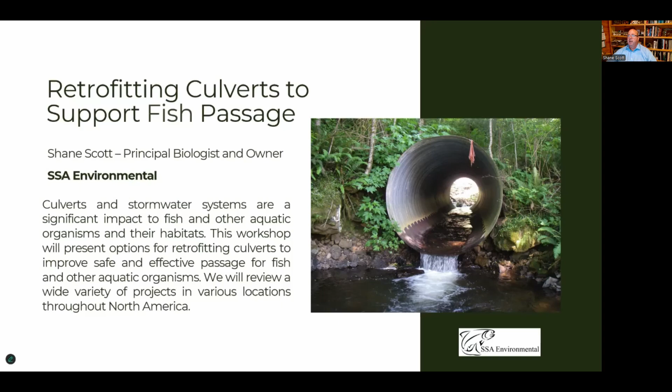So this is the little blurb I had on my registration: talk about culverts and fish passage today, and what we could do at culverts, sort of a low-tech approach to a big issue here and around the world. Just real quick by way of organization: I'll do a quick introduction, background, definitions, just so we're working on the same language. As I've learned, the Corps of Engineers have their language, engineers have their language, accountants have their language. What's the language of culverts? We'll talk about that today.

Then the magnitude of the problem, focusing on North America, the history of retrofits, what we've done in the past on culverts to help fish get through, and then current technologies, some ideas, some pretty exciting projects we're working on, and case histories. I've seen a registration list for this presentation, a lot of engineers, stormwater types - it seems like folks that need answers, or know what questions to ask.

I spent the weekend up in the Metro Vancouver area in BC working with different stormwater groups on several culvert retrofits and inspections, so it's kind of a new world for me. And then some time for Q&A at the end. If anybody has a clarification question, something short I can respond to, please ask - John will help facilitate that. Longer, more in-depth questions we can answer at the end of the program, or you'll have my contact information and we can talk about that at the end.

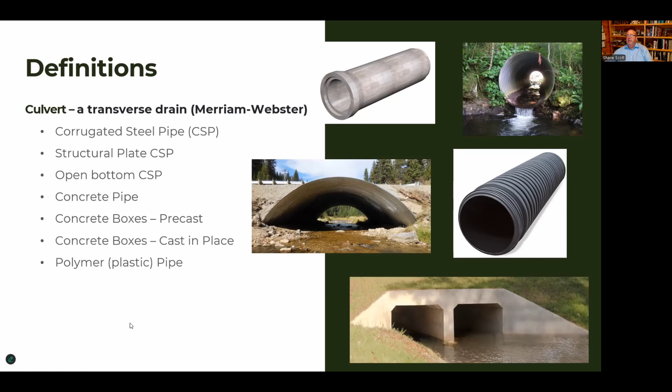This was new to me until a few years ago. I was always fish passage - I'm a fish passage biologist, concrete and salmon, that's what our world is. But working outside the Pacific Northwest and working now internationally, this term AOP is our kind of term of art in this fish passage world, and it's aquatic organism passage.

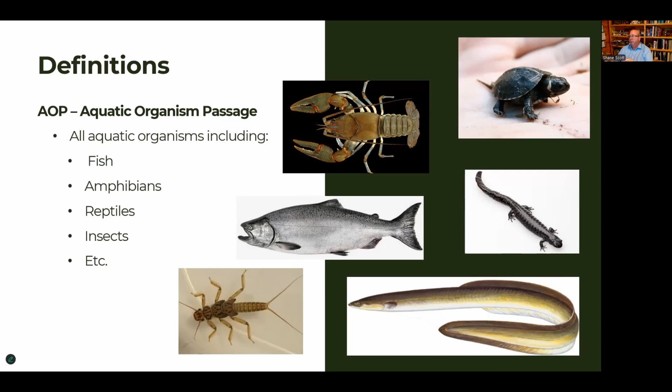So it's not focusing on just salmon, but all the other organisms—you expand to everything in the creek, all the creepy crawlers, anadromous species, all the different kinds. I've worked on culvert projects that include all of these species.

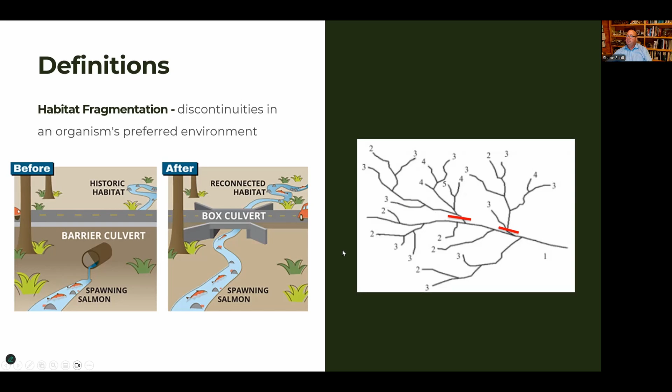And then success, that's an amazing one. That's really interesting—what is success? I work with federal ESA regulators down to, well over to, asphalt contractors replacing a culvert in Pennsylvania. So it's a wide variety. In my world, it's expanded opportunity, getting critters past those sites.

That's one success. Species reintroduction, that's another measure of success. Reduced habitat fragmentation in general. And one I didn't put down here—I spent my whole career working with engineers, and I joke that my job is to keep engineers out of jail. They're always building things, always going out and doing stuff, but it affects the environment often, and my job has been to help minimize that. So maybe a fourth bullet is keep the regulators off your back.

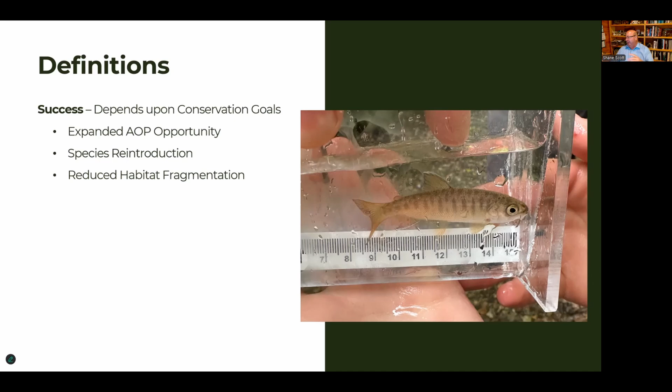So this is what I've been working on the last several years—trying to understand the magnitude of the issues of culverts and their effect on aquatic organism passage in North America primarily, but also looking out at the world. There are wonderful groups out there collecting and analyzing culvert information. There's the National Aquatic Barrier Inventory, which adds up all the information out there. Every state and jurisdiction seems to have some kind of list of culverts and some kind of assessment.

But just to give you a reference on the magnitude of what we're dealing with—this is the National Aquatic Barrier Inventory. In the Pacific Northwest states, Oregon, Washington, Idaho, there are 775,000 barriers. Only 8% have been analyzed, and only 0.5% have actually been mitigated. So a lot of people are doing a lot of good work, it's just such a huge issue.

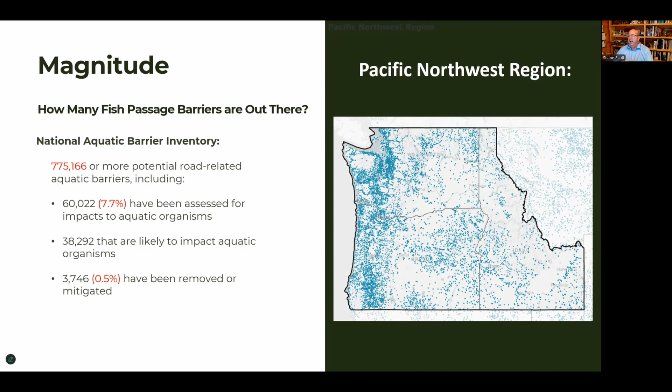We know where all of our dams are. We're working on, especially in the Columbia River and Pacific Northwest, spending a lot of time, effort and resources trying to reduce the impacts of those dams. But you have all these culverts, just a mass of culverts.

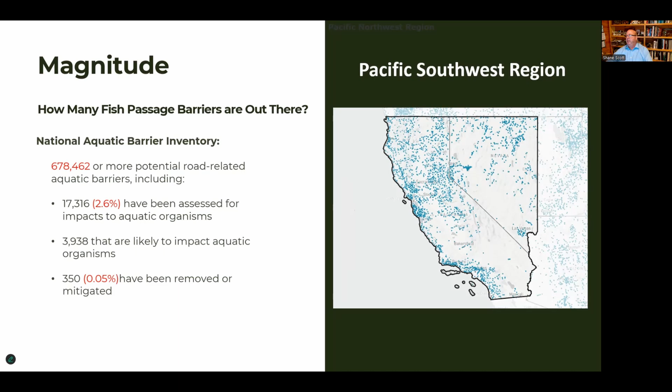Another area, the Pacific Southwest: 680,000 barriers, and only 0.05% have been mitigated. Once again, a ton of money is being spent. There's just so many—it's a death of a thousand cuts on these critters.

In the Northeast, 450,000 barriers, and 0.03% have been removed or mitigated. A lot of good work going on out there, but the problem's just massive.

The thing that really got me involved with culvert passage was a Supreme Court case in Washington State between the state and Native American tribes, primarily in the Puget Sound area, where the decision was made to protect the habitat that supports salmon. The agreement was that Washington State Department of Transportation will replace 400 culverts by 2030 to open up about 90% of habitat blocked by culverts.

To date, 146 have been corrected, and the current estimate to finish all of them is $7.8 billion. There was a three-culvert project just awarded north of Seattle on Interstate 5, our main north-south route—$136 million to replace three culverts. Now what can you and I do with $136 million? It's such an incredible cost, and that's just in the Puget Sound area, all borne on the backs of citizens in Washington State.

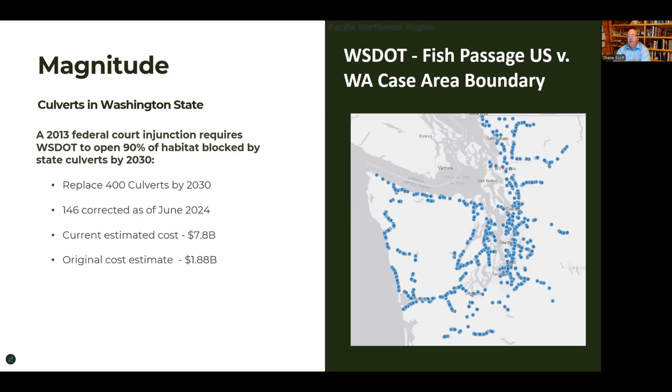So you look at the cost, you look at the magnitude, and there's got to be a better way. Right now Washington Department of Fish and Wildlife has a barrier removal board, and it's a very common grant process where you compete for dollars to get your culvert fixed. The 23 to 25 project list has about $85 million. At that rate, we're never going to get to that $7.8 billion. We're never going to fix all those culverts, and this is a Supreme Court decision we're bound by.

35 of those projects are just planning and engineering, almost 10 million. 76 projects, about $76 million to actually get out on the ground removing those barriers.

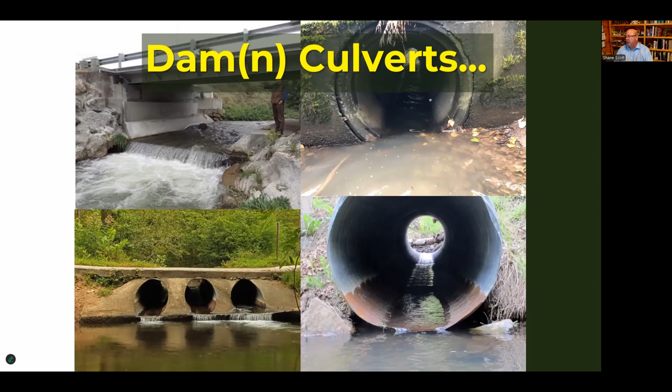So now let's talk about those culverts. This is the kind of world we work in, the culvert world: bridges, bad abutments, water surface drops, eroded culverts, just ugly. So what is the problem with culverts?

It's interesting until you really sit down and think about it, it's pretty obvious, it's all about hydraulics. You have high water velocities because there's nothing in there to slow down the water, shallow water depth, often steep gradient, and then a plunge pool at the lower end of your culvert, and that's when you get a passage barrier.

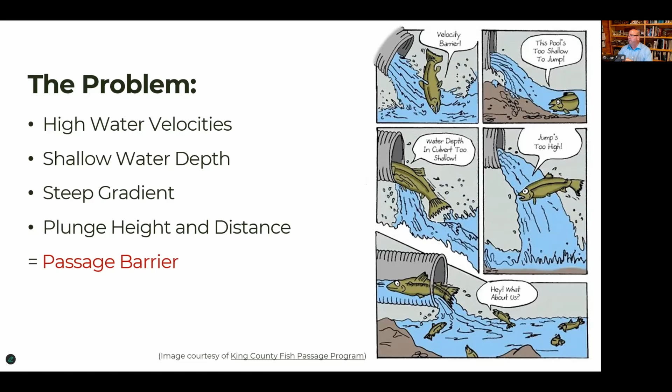It's not always 100% passage barrier. Washington Fish and Wildlife has a 33, 66, and 100% barrier rating, so there's ways to assess that, probably for adult salmonids. There's certain size criteria we use here in the Northwest. You'd have different criteria in different areas of the world for those species of concern. But there's a kind of fun King County Fish Passage Program cartoon of what we're dealing with in the culvert world.

So now what? There's really two choices: culvert replacement, which we're doing full speed ahead, is really expensive but it's the correct thing to do, it's a permanent fix. And then you have culvert modification or retrofit, and there's different levels and types of that. We'll focus more on number two.

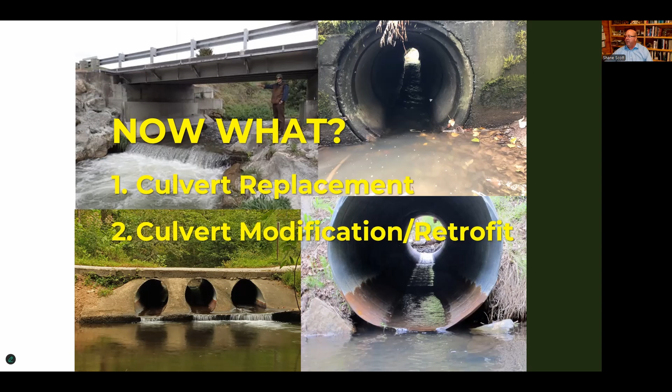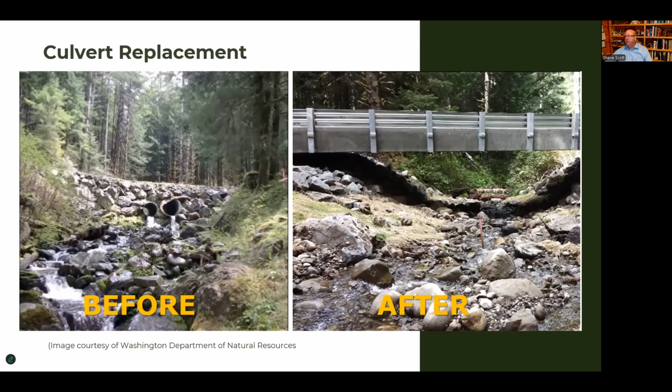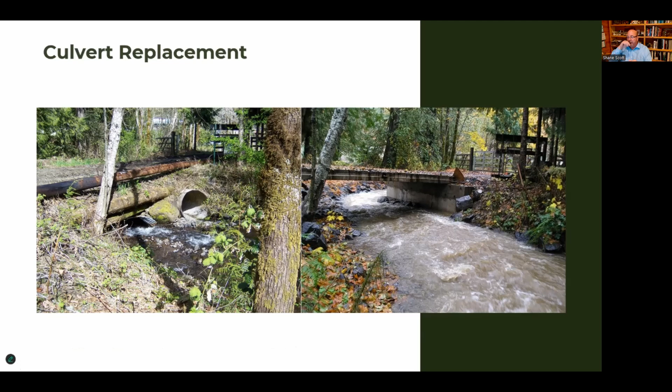I'm just demonstrating some examples. This is Tualatin Creek down in Oregon, just west of Portland. On the left are two old culverts, not in good condition. On the right, they bridged the whole thing - you just see a different character in that creek. But this is what we're dealing with.

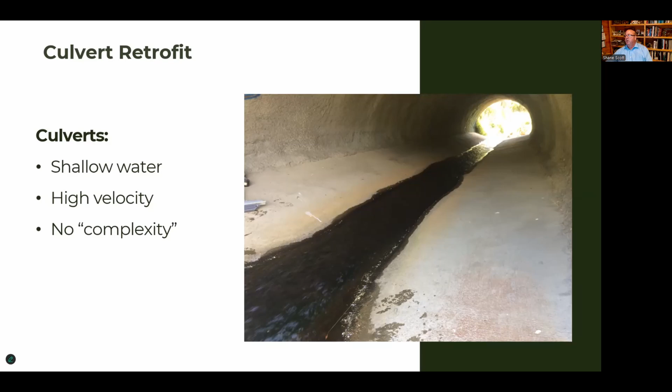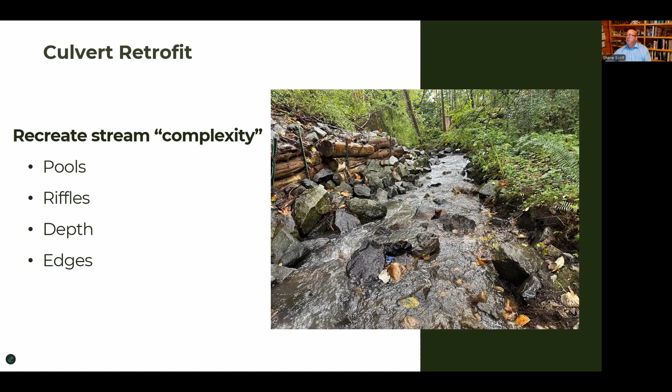This is up in Surrey, BC last weekend, and there's a big baffle installation at a 5-foot culvert right behind me, looking downstream, and this is a perfect example of what stream complexity is. In a culvert retrofit, you're trying to recreate that complexity. You're looking at this, you have all the rocks and the logs and the overhang, the pools and riffles and depth and edges, and all the critters that live in the stream can take advantage of those habitats for feeding, foraging, and resting. So you're trying to do that in your culvert.

And I like this picture. On the left side is Bonneville Powerhouse One, the first dam on the Columbia River. This fish ladder was built when the dam was completed in 1938, and it's just weirs and pools. This is where you take your kids and grandparents, everyone in the region goes to Bonneville Dam and looks at the fish and the fish ladder, down to the window - it's a great opportunity. But then on the right are baffles in a culvert, and this picture kind of quantifies what we're talking about today: reintroducing that complexity in a culvert.

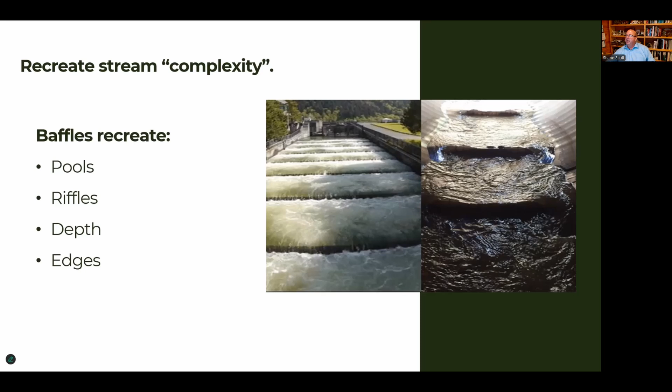So the concept, and I'm still trying to develop this as my elevator speech, is you're trying to mimic the complexity in the culvert that you see above and below a culvert. So say your stream is pretty high gradient, a lot of rocks and riffles. The baffles inside the culvert will be closer together to form more of that complexity.

So the aquatic organisms that live in the stream, they have the ability to live there. They have swimming ability and forage, and they exploit that habitat. They can also exploit that habitat - not rearing habitat, but passage and movement through. So it's reducing habitat fragmentation.

That culvert on the right has similar complexity, so you're kind of making that culvert disappear in the environment. You're making it part of the environment instead of an engineered structure that just shoots water through. So that's my 2-minute elevator speech - it's making the culvert disappear.

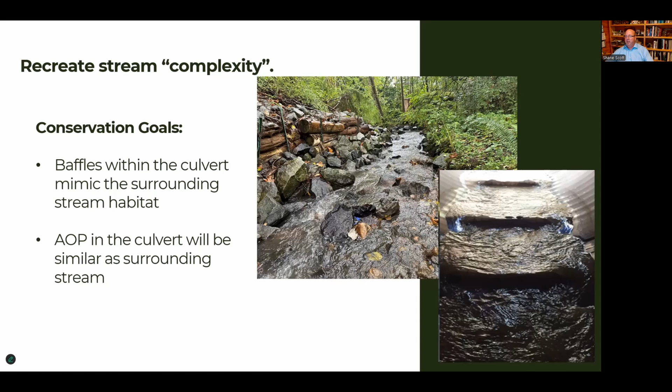So retrofitting with baffles or weirs, that's what we'll talk about here the rest of the hour.

So kind of interesting, I asked ChatGPT where was the first fish ladder. Come to find out it was Scotland - once again the Scots came up with it. 1837, a mill owner came up with it - just a set of weirs to slow water velocities and create step pools and create complexity in the culvert.

Another definition I guess I should have said was expands AOP opportunity. I mentioned that WDFW has a rating like 33% passable for an existing culvert. If you were to retrofit or change it, you would potentially increase that to 66% passable. You're not going to go from 0 to 100, but if 33% of the time your species get through and you expand that to 66% of the time, that's expanding AOP opportunity.

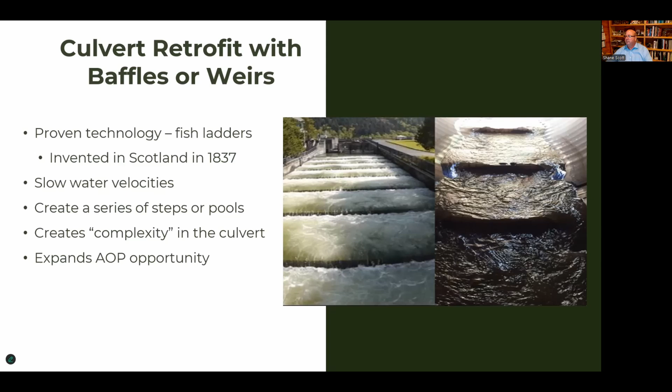So there's different types of baffles. Solid baffles are kind of what were developed back in 1837. This is what you see in fish ladders. This technology you see in channels and culverts, and you see the different materials: metal, wood, concrete, plastic.

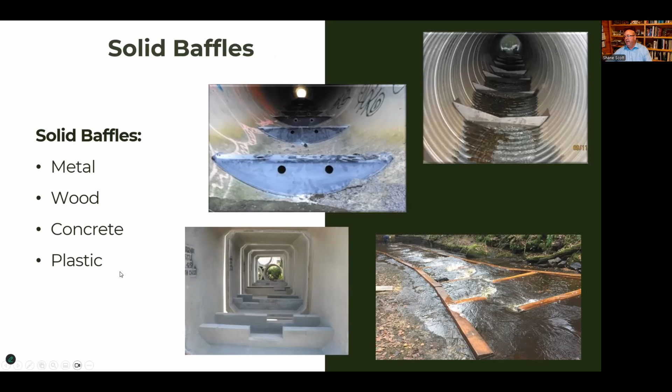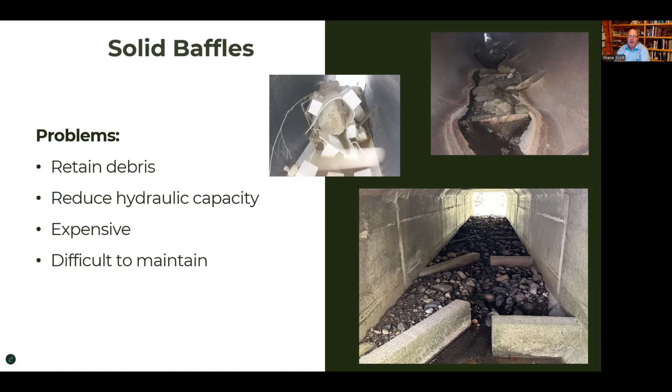Commonly used, but they have issues - they've kind of fallen out of favor. The big issues with solid baffles: they retain debris, reduce hydraulic capacity, they're expensive and difficult to maintain. That picture on the bottom right, Latimer Creek in the township of Langley, I just took that Tuesday. Beautiful looking culvert, great looking baffles, but it's completely filled up with sediment. So you've reduced hydraulic capacity of your box culvert, and you might as well just have a smooth bottom. There is some roughness there, but it's full of gravel. So because of the issues with solid baffles, they've kind of fallen out of favor in the culvert world.

Your culvert plugs, overtops, and you get this failure, which is just a huge problem. Emergency fixes, incredibly expensive. The environmental impacts of sediment being released in the stream - it's not a good thing.

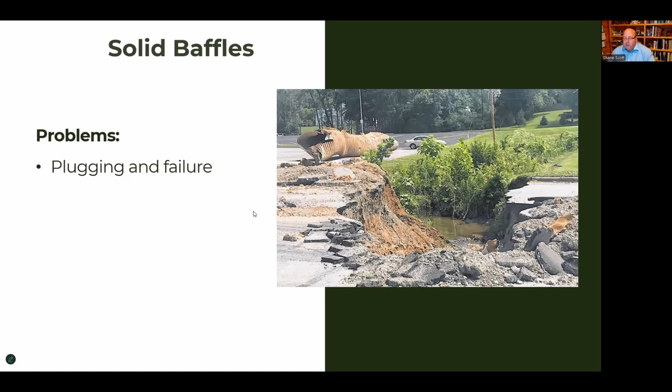So I met a gentleman many years ago over in University of Amherst in Massachusetts named Kelly Hughes from New Zealand - an inventor, a lover of the environment, a wonderful man. And he came up with these flexible baffles. He put a baffle on a culvert on his property 15 years ago and saw that it formed sort of a fish ladder, and developed a company where he's now - I'm his North American partner - and he's working all over the world on developing, testing and installing these flexible baffles.

There's similar benefits as the solid baffles - they're the same idea, you're adding complexity to your culvert, but they don't retain debris and they have minimal effect on hydraulic capacity. That's the big difference. Many culverts are undersized, or as things get warmer and we have more rain, culverts become undersized. We'll talk about some of the design factors, but that flexibility is the big difference between the two types of baffles. They're relatively inexpensive, very easy to install.

I have high school kids do it all the time - I'll show you some of that work. The material we use now is santoprene, a non-toxic rubber polymer used for water collection systems. You go out to your car and look at the gasket around your car door or your trunk - that's santoprene. Very resistant to temperatures, crushing, very flexible - and it's another benefit of flexible baffles.

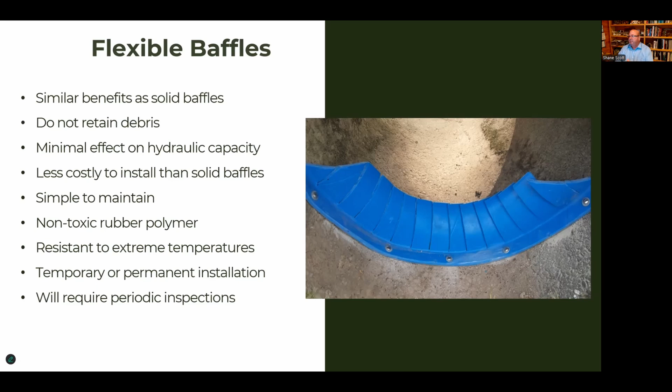So for the flexible baffles, they're customizable for size and shape. In New Zealand, you're dealing with weaker swimming species, so the installations tend to be smaller, allowing critters to get around left and right during summertime low flows.

They have freshwater shrimp, eels, and a galaxiid, a small minnow - that's a very common species of interest in New Zealand.

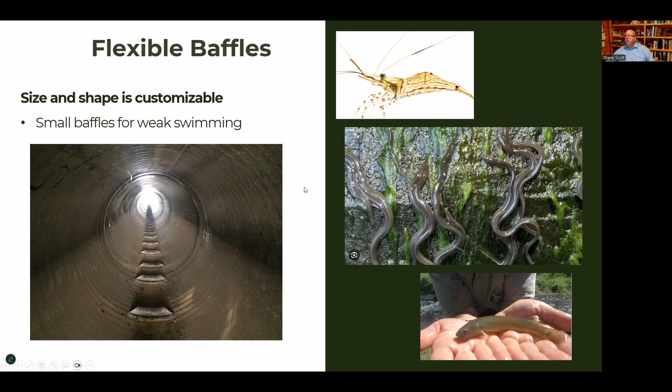Here in North America, in the Northwest we only have salmon, so you wouldn't think we have anything else. But expand across North America, especially the East Coast, and you have alewives and shad, which are big, important, cornerstone species for food webs.

That's very similar to a natural stream - as rivers come up, fish tend to move to the edges to get out of the main flow. So you're mimicking that condition in your culvert.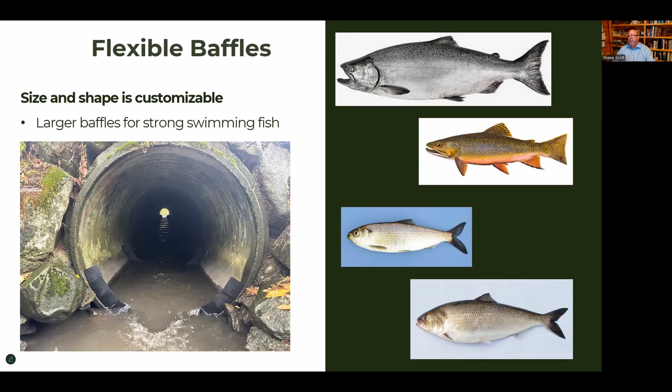Found from Pennsylvania down into North Carolina, it's an ESA-listed turtle, the smallest turtle in North America. They don't like to go through culverts without gravel. So you bury your culvert and put baffles in, covering down the middle with gravel. That allows the turtles to move through while still having the baffling on the sides.

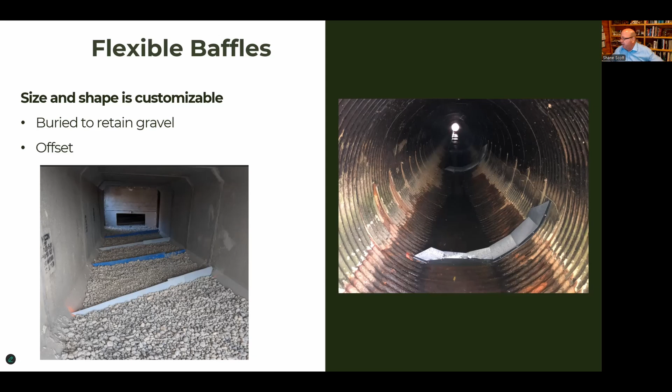So you do get that ponding, which means your culverts do not go dry and strand weaker swimming organisms. These are installed very simply, with self-tapping screws into HDPE, CMP, or polymer.

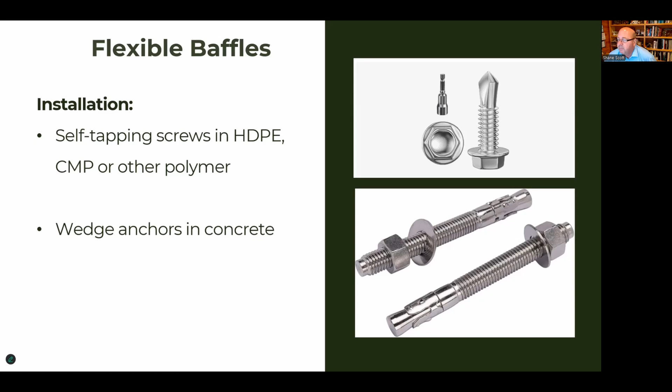We can go up to about 15 millimeters of metal with these self-tapping screws - they're amazing. Then there are wedge anchors, pretty common, from Home Depot. We recommend 304 stainless steel for our applications. We're always looking at other products, but this is our standard proposal.

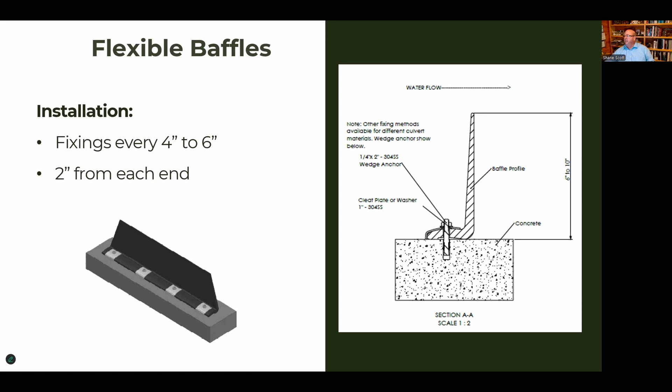Your water flows from left to right, so as the baffle bends over, you can see the logic of that. They have a bullnose design so you don't get debris underneath that lip, that connection point.

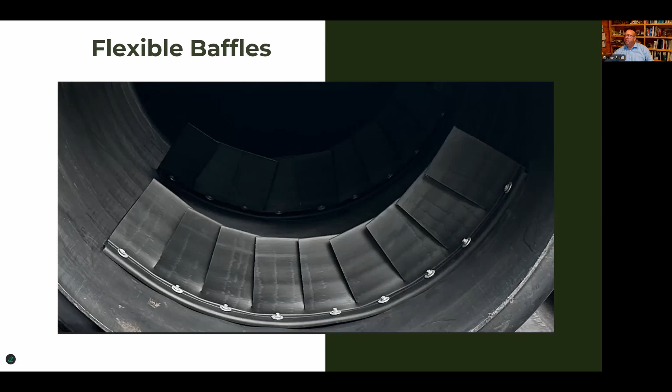This was last weekend at a watershed event, Cougar Creek Stream Keepers in Delta. This is just a demonstration of what the baffle looks like - this is a 3 foot corrugated HDPE culvert. So how do we get there?

Being a geeky biologist, I talk about a prescription for baffles - what do we want to accomplish? We want to accomplish pools and lower water velocity, so we have some criteria.

Adult salmon can handle up to about 4 feet per second maximum water velocity at times, while other times it needs to be 1 foot per second. So we develop a baffle configuration to meet that.

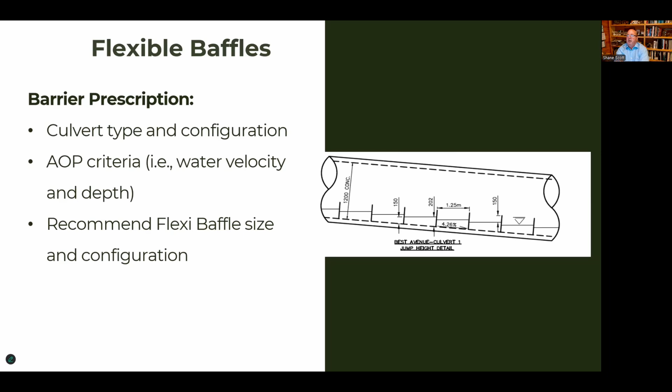This is all on my website. Then the gradient - I work with my engineer friends on baffle spacing dependent on gradient. The steeper the gradient, the closer your baffles are spaced to maintain pools in between each baffle, so you don't dry up that habitat or that space.

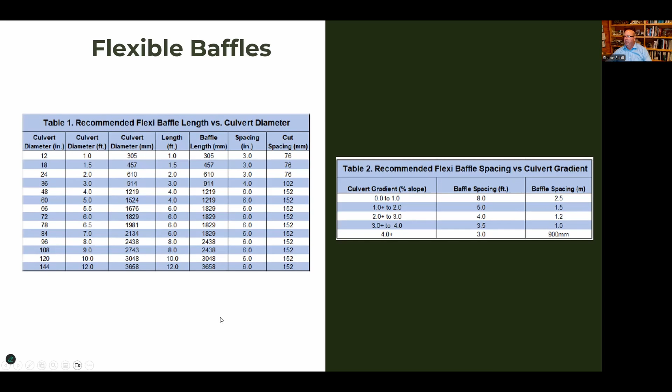And then this is a conversation we're having a lot - the flexible baffles. What does it take to force them to flatten? These are numbers we came up with. We can get into them later.

Then a Manning's number - conservatively, we estimate it about the same as it would be for a corrugated culvert. So 0.024 on your Manning's. These are open for discussion, just rough estimates we have in our conversation.

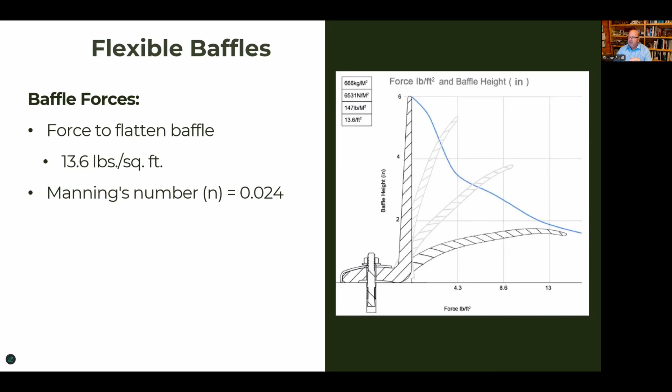So we can talk about forces and what we think is going to happen, but we started using CFD modeling. This is the last paragraph in my presentation - I like bullets.

We use CFD modeling to illustrate what's happening in the culvert, and we've got a library of culvert sizes, flows, baffle configurations, and gradients that illustrate what we see, and we can often compare what we see with this. For those not familiar with CFD modeling, it's just an illustration of the depth and velocity of flow in your culvert in different situations. Blue is slow, red is fast - it's that simple.

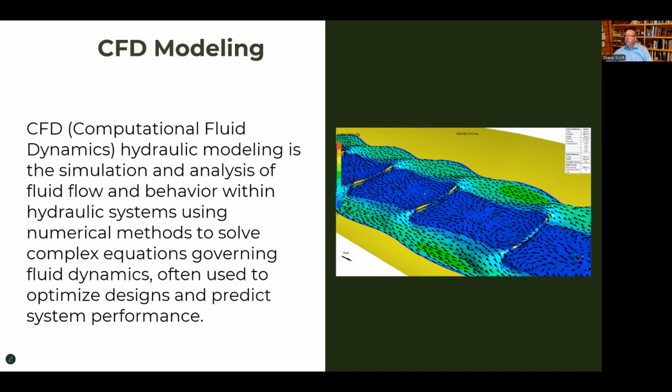So I'll give a demonstration of a project we did. I'll talk more about specifics, but we had a 12-foot wide, 8-foot tall squashed culvert up in Alaska we were working on. They needed to fix it, and Alaska Fish and Game wanted to know what we could do to improve fish passage through this culvert. So we developed a baffle configuration - baffles in the bottom of the culvert with a 1 foot spacing on one side to allow fish to get around. We could install these things and just look at it to see what happened, or we could do the CFD modeling and actually give a visualization of what we should be seeing.

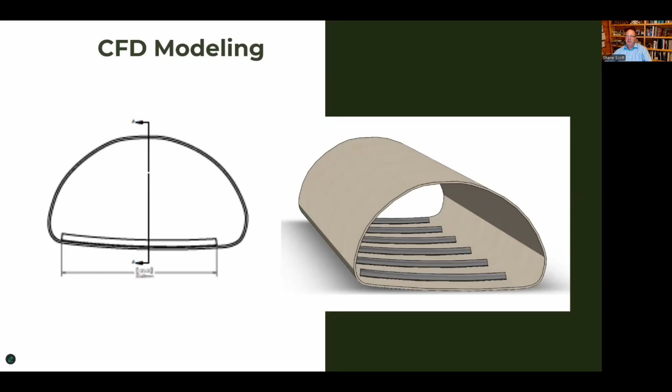This is roughly the creation of the model. Every polygon is a calculation, and you put a force on a polygon and it affects forces outside of it. You can see over here, this little green thing is the baffle, and there are a lot more polygons around that, so you get a more refined estimate of flows. You do this for your whole section of culvert, and then you apply forces - in this case, a flow and a volume.

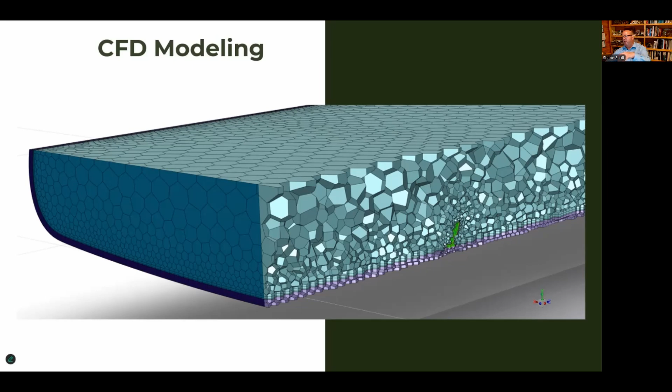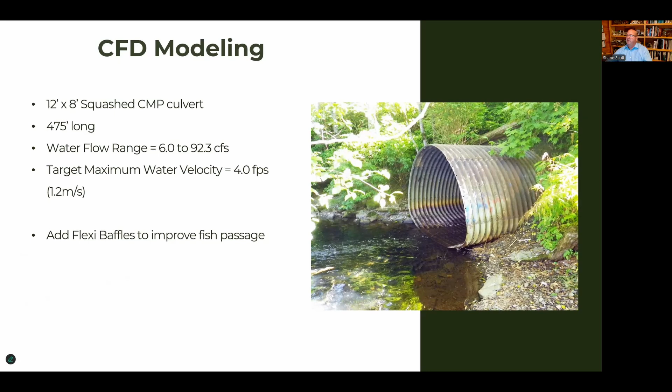So just to demonstrate in this real life case: this 12x8 squashed culvert, 475 feet long, 2 flow ranges. We want to see if we could get a 4 foot per second maximum velocity. We looked at this with and without baffles, and this is what we get - these are two outputs.

It'd be hard to go into a culvert and take one spot measurement and average flow, so we don't like to work with average flow in a culvert. When you retrofit a culvert, you create many more complexities, so there really is no average.

This is at 92 CFS, which is the 90th percentile flow. You can see on the left you're getting 3 meters per second, almost 10 feet per second velocities. On the right, you're getting much lower velocities, from 6-inch depth up to 20-inch depth. Let me bring you in a little closer.

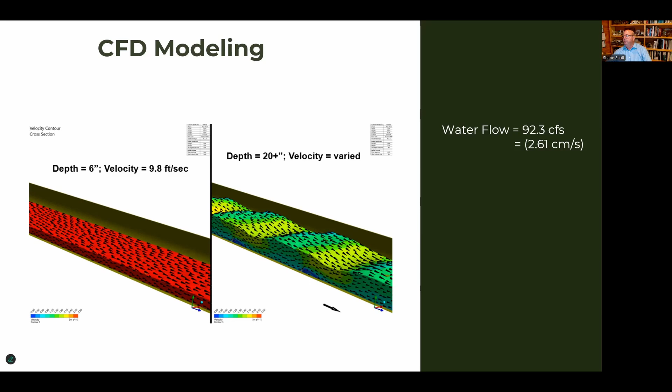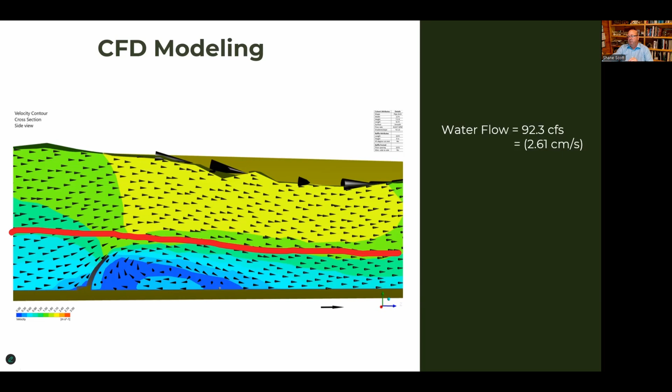Here you can see the velocity and the patterns of flow with the baffles in place. This line here is about everything below the 1.2 meters per second, or 4 feet per second, velocity where a fish could swim. Right behind each baffle, they could rest. I have a video, not sure if I can show it, still figuring out this technology. In this project in Alaska, we have videos of small fish laying right behind that baffle. It's pretty exciting to see.

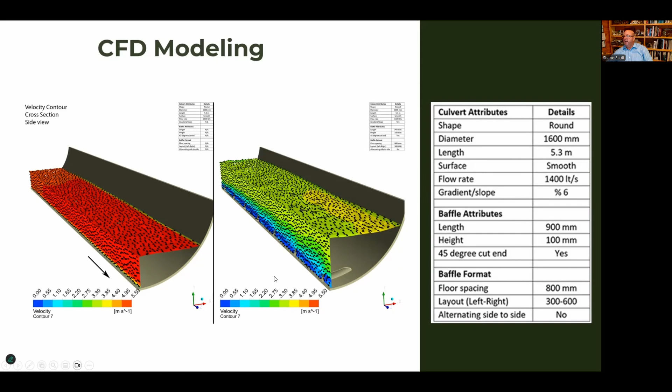So just another one of our library of things to look at. Let's talk about retrofit cases, before and after.

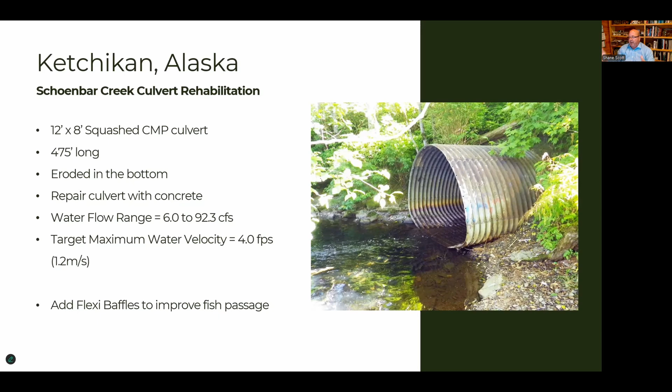This should be familiar, we just looked at this. This is Schoenbar Creek Culvert Rehabilitation in Ketchikan, Alaska. We talked about the target velocities and the length, it's 475 feet long. They wanted to add flexi baffles to improve fish passage. Well, the problem with this culvert was that it was eroded along the bottom.

You can see this damage. Another term I've learned in the last few years is slip lining, when you put a lining inside an old culvert to repair it. The capacity of this culvert was almost too small, so they couldn't reduce the size too much because they needed the capacity. So what they decided was to shotcrete the inside and fill the bottom to fix these erosions.

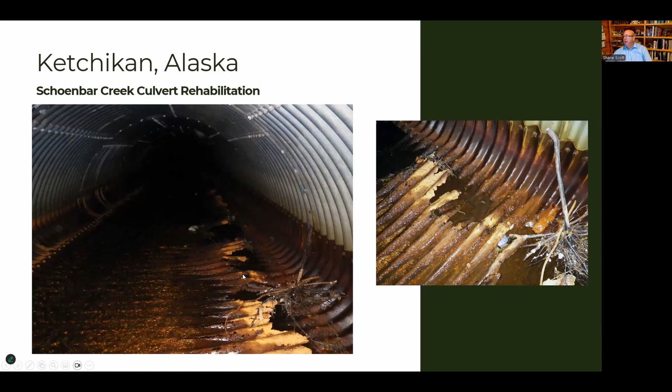I've got a great video, but playing it on Zoom is tough. You can see how they relined the inside and then filled up the bottom of the culvert with concrete and attached 81 10-foot flexi baffles. The cost of that was $35,000 for all the material.

The retrofit itself is what's much more expensive, I don't have that cost. But the city got a fixed culvert and improved fish passage. I could post a video of trout getting around this thing right now. The engineer who worked on this told me that when they returned water to it, within 2 hours fish started passing into this culvert.

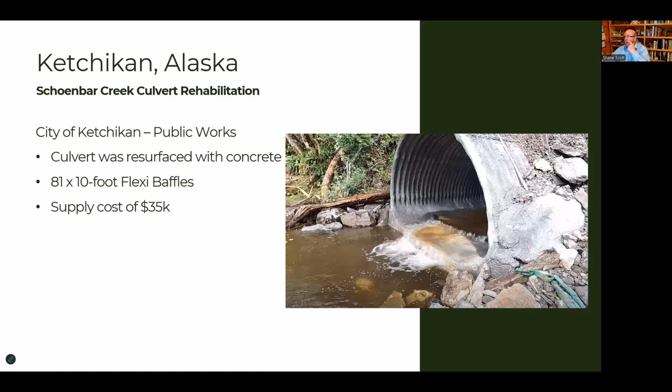Here's an example of a box culvert at Ferndale, Washington, near the Canadian border. This is an 8-foot square cast-in-place box culvert, 100 feet long, still built in the 60s, but in excellent condition with very little spalling. It's just a flat, efficient chute with water pushing through, with chum salmon, pink salmon, maybe some coho. It's pretty close to the ocean, maybe a Chinook or two.

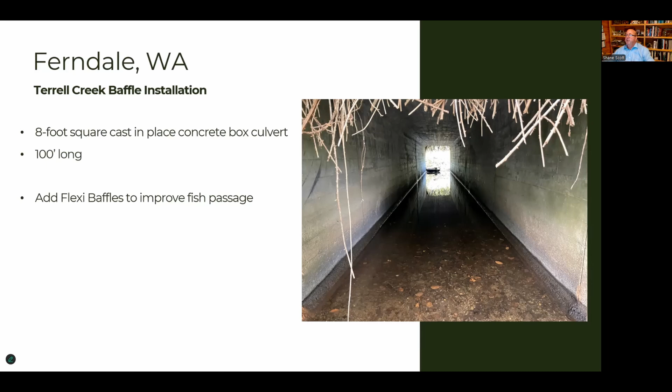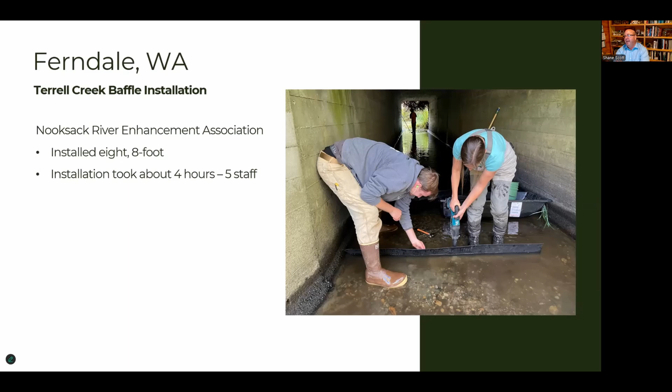The Nooksack River Enhancement Association wanted to install baffles to increase complexity and improve passage through this culvert. So they installed 8-foot baffles, and it only took about 4 hours. People who were kind of non-professional contractors put in wedge anchors and installed this. It took 2 days to cut the briars down just to get to the culvert, but once they got in, it was 4 hours to finish the project.

The supply cost was $2,300 for the baffles. So you've improved passage, the velocities through here are not huge, and this installation should last for years.

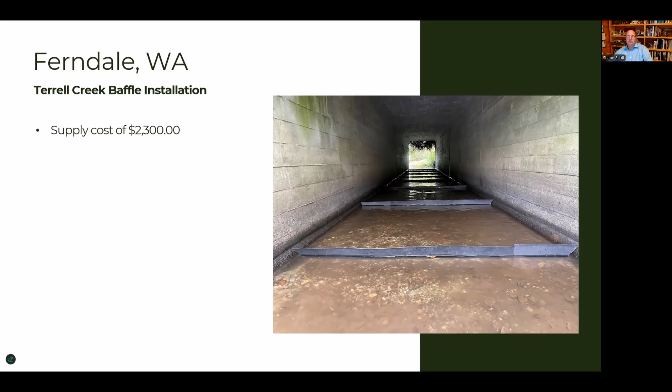Oh, I just had a noise. What was that?

This is a project we finished last year, up in the city of Surrey. In the 50s, engineers designed and built this 500-foot long, 6-foot channel to convey floodwater away from an area in the city of Surrey. The gradient is about 1 to 2 percent, it varies through, but it's a depth and velocity barrier to everything. There's been no fish past this since the 1950s.

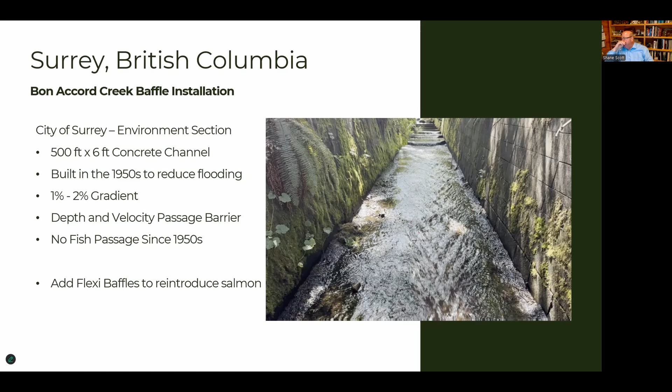There's been surveys, electrofishing, and eDNA. If you've not looked it up, it's amazing - it's kind of a Quincy technology. You take a water sample, look at what DNA is in that water, and you can identify pretty much every organism in that water. It's forensics type stuff, and there's been no salmon above this culvert since the 50s.

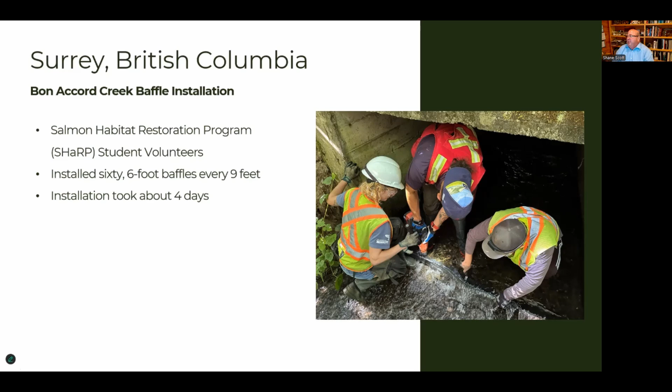So we worked with the Salmon Habitat Restoration Program student volunteers out of the city of Surrey, and taught them how to use a Hilti, taught them how to use a ratchet even, and we installed 60 baffles throughout this culvert. The installation took about 4, going into 5 days, but they were high school kids - it was sunny in August, and a lot of fiddle farting around. But once we got everything in, it looked great.

So this is what it looked like afterwards. The project was $18,000 to return fish back to some place we haven't seen them in 70 years.

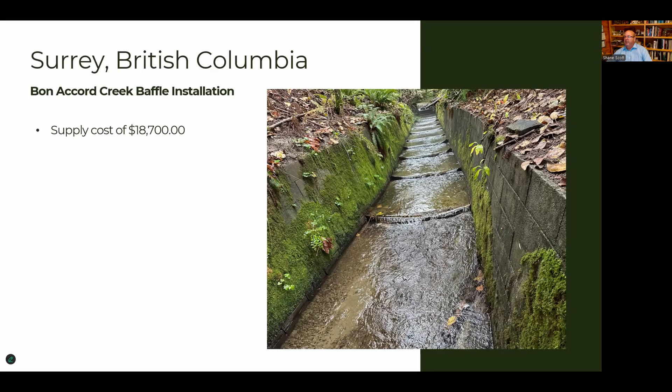So this is a video of what the culvert looked like at low flow during the summer. Walk through here real quick, but it's the whole 500 feet. There's a bridge, a road crossing above and below this. We've installed the baffles about every...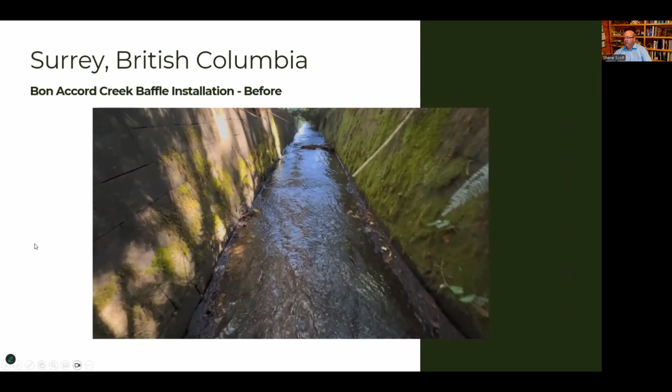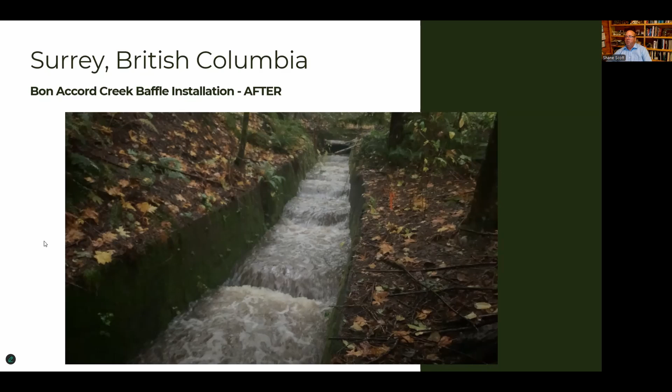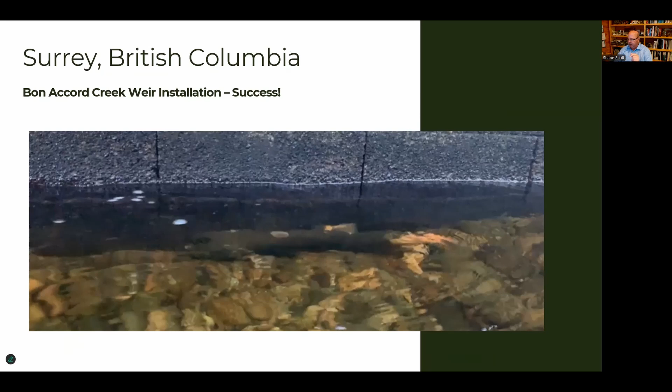So now we'll talk about here in Washington State. We have a lot of experience with expensive road culverts and culvert replacements, which, once again, is the best way to go, but the cost is just staggering. There's often many situations where you can put in flexible baffles as a temporary fix until that project is completed.

Or as a management decision, you put the baffles in, and you'll need to go in and monitor every few years to make sure they're still there and operating. But the magnitude of cost is so different that it's almost a simple decision to go in and put these flexible baffles in and improve aquatic organism passage as you're going through your priority list for replacements.

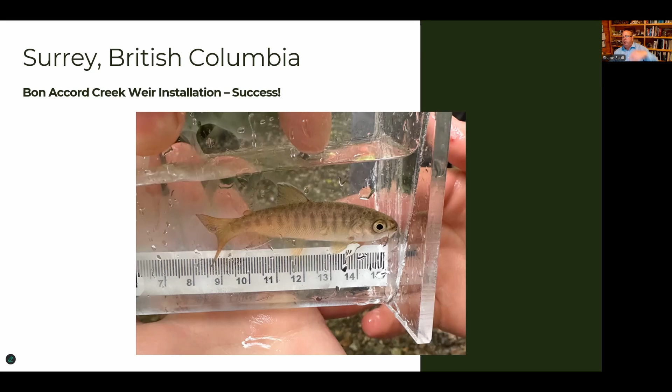So this is King County, Washington, the Seattle area, which has a great inventory of their culverts and their passability, working with WDFW. They have a list of several projects with estimated replacement costs. So what I did is I looked at those projects, the replacement costs, and then prescribed what would be a baffle configuration and a cost to put baffles in now.

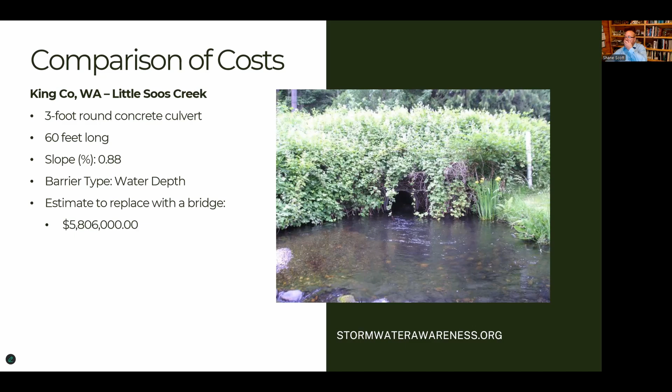So I estimated to put 8 3-foot baffles in here would cost $1,300 and take less than 1 day. It's a concrete culvert, use wedge anchors, and you would improve passage through this culvert, either permanently, but more likely temporarily. And then you could work on - how long does it take to work in a water body with ESA listed fish? I mean, a couple of years for permitting.

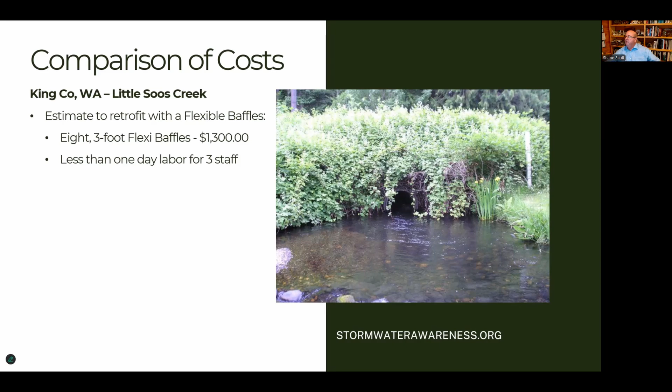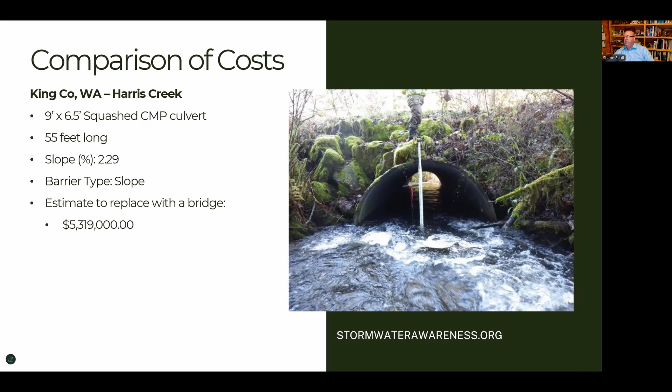So another project - this is a larger 9-foot wide squashed culvert, 55 feet long, 2.3% slope, and the barrier type categorized by the county and the state as a slope is the barrier water velocity. The cost to replace this is 5.3 million. You could fix this for about $9,000, reduce that water velocity, improve passage, and it'd take about a day for three people - one on the Hilti, one holding the baffle, and another person running materials back and forth.

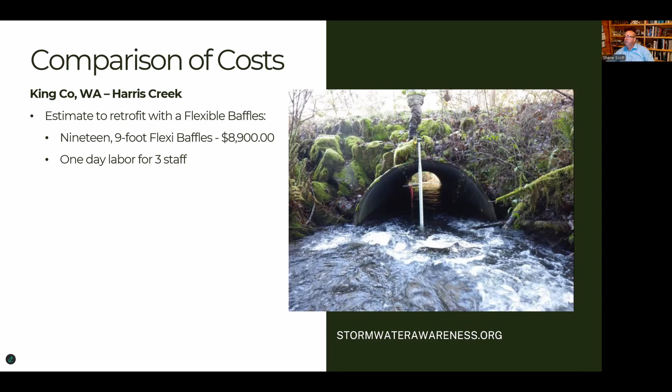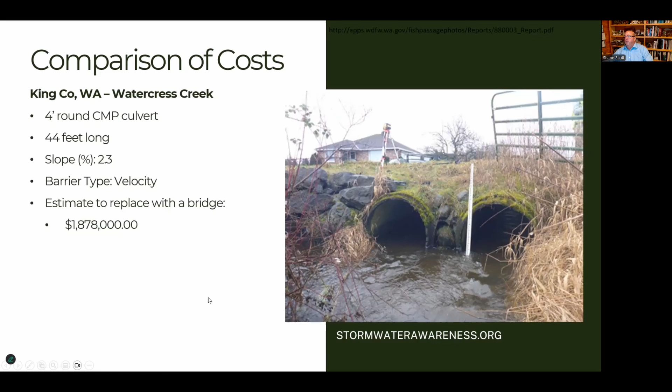This one is much less expensive. Two shotgun culverts, 4-foot CMP, another velocity barrier because the water velocity is too high through there. $1.8 to $1.9 million to replace. This one would take 2 days because there are lots of baffles - 30 4-foot baffles, 15 in each, at $4,700. Those 3 projects I just showed you are relatively close together. You can put the baffles in for just a few thousand dollars, inspect them annually to make sure they're still there, but still put them on your replacement schedule. Or if you have a list of 1,000 culverts and this is number 733, and you're never going to get to it due to cost and resources, you have still improved passage through this culvert.

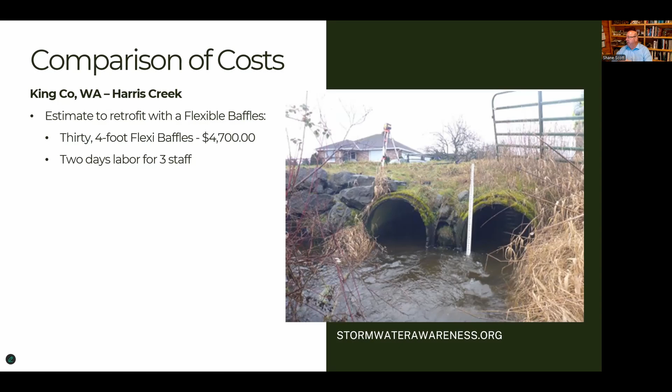This is kind of what we've been working on in North America. I think 2018 was the first installation of these flexible baffles, by the Johnson Creek Watershed Council in Gresham, Oregon, just east of Portland. They now have three installations, but they were the first in North America. Now it's spread to Alaska, British Columbia - 15 states, 4 provinces. Kelly's working all over Europe, New Zealand, Australia. My biggest customer right now is Pennsylvania DOT. I'm in Washington State, but they developed a program doing culvert maintenance from bridges, concrete bottom bridges, culvert replacement, new culverts. They do something for fish passage, a retrofit - not always flexible baffles, sometimes concrete, sometimes metal. It just depends on the application. But they love their trout in Pennsylvania.

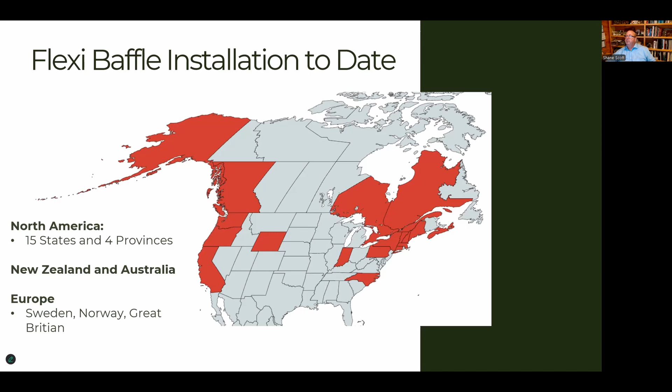So I guess in summary, we finished ahead of time. You guys can get back to your day.

Retrofitting with flexible baffles - as I mentioned, they're low cost, easy to install, for permanent or temporary installations. New Zealand is years ahead of us in North America on culvert management. Kelly works with different roading authorities where you go to every culvert in a watershed and assess it and do something for AOP. Sometimes there's a small 2-foot culvert - you put one little baffle in and some rope to help creeper crawlers get into that culvert. Other times you put in baffles, but then you do have that annual inspection that looks at both the biological condition and the physical condition. They're finding they're saving millions of dollars on culvert replacements because they're able to identify problems before they ever pop up as issues for repair. Repairing something in a planned manner is a lot less expensive than an emergency repair, like a collapse on a culvert. And they're biologically effective for improving AOP.

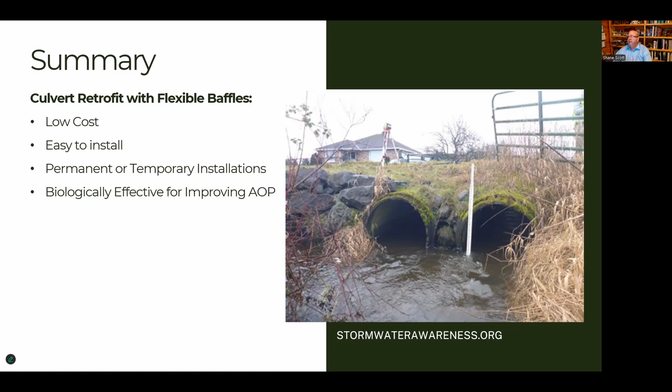Baffles are an old technology. This is just a better mousetrap with this flexibility. It changes the whole calculation on the value of retrofitting culverts - it gives you an option. And every biologist for almost 40 years has had to put this in their presentation - this is Gary Larson, did all kinds of fun fish cartoons, but 'Norm's Spawning Service.' This is what we're trying to do here in the Northwest - a lot of places, it's just getting the fish back to where they belong, exploiting that habitat. I think we have 6 million identified culverts in the United States now. I could show you that database from a different group, the National Culvert Inventory, but it's really just about getting fish back to where they belong.